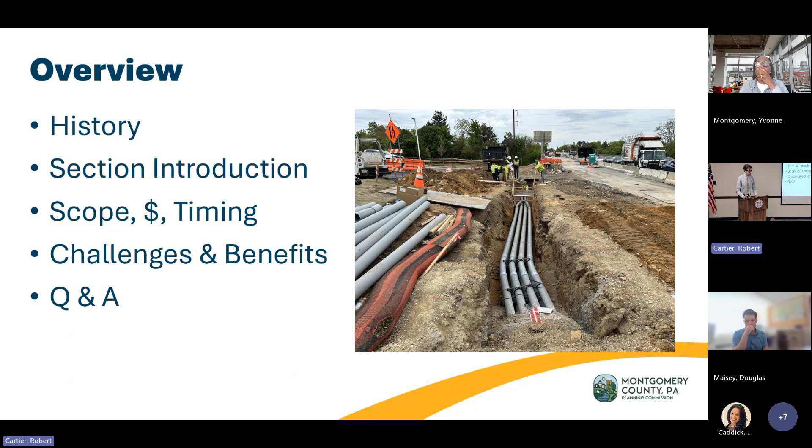The piece of Ridge Pike that the county owns is about 5 miles in total, from Norristown to Philadelphia. We actually asked Morgan Rauscher up in the County Roads and Bridges Department for the full explanation of how exactly this happened, that Montgomery County came to own Ridge Pike.

For those of you who were here with us during our MontCo Pike studies, you might know that the county owns a number of different pikes. These are all old historical turnpikes, toll roads established in some cases back in the early 1800s, like Ridge Pike, which was actually established in 1811. It operated as a toll road for most of the 1800s, and then, like many transportation assets, didn't end up making its own profit and therefore went bankrupt.

In 1872, the piece of Ridge Pike in Philadelphia was bought out by the city. The rest was kind of left in limbo, and there were a number of different acts the county had to take in the late 1800s and early 1900s. In 1905, an act said condemned or appropriated turnpikes were required to be maintained by the county. This was then turned back to the townships in 1909, and then turned back to the county in 1911.

Since 1911, Ridge Pike has been under our control in total. We first paved it as a county in the 1930s and did widening in particular pieces in the 1970s. It covers 3 municipalities at this point: Plymouth, Whitemarsh, and the Panhandle portion of Springfield Township.

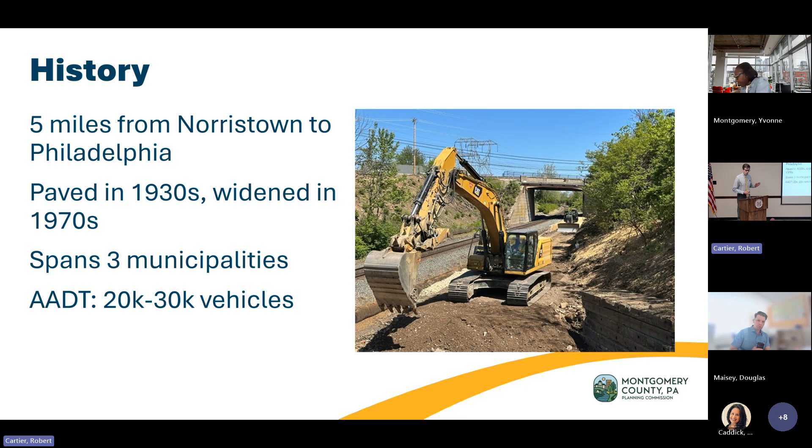Recent daily traffic counts on this stretch of Ridge Pike are in the 20 to 30,000 range. Back in the 2008 era, when we had our peak traffic counts around the region, some parts of Ridge Pike were pushing 35,000 vehicles per day. But right now we're usually in the high 20s range for all the various sections.

Here are the 4 sections we're going to be talking about today. We have broken them up into different letter-coded sections based on how the projects are progressing.

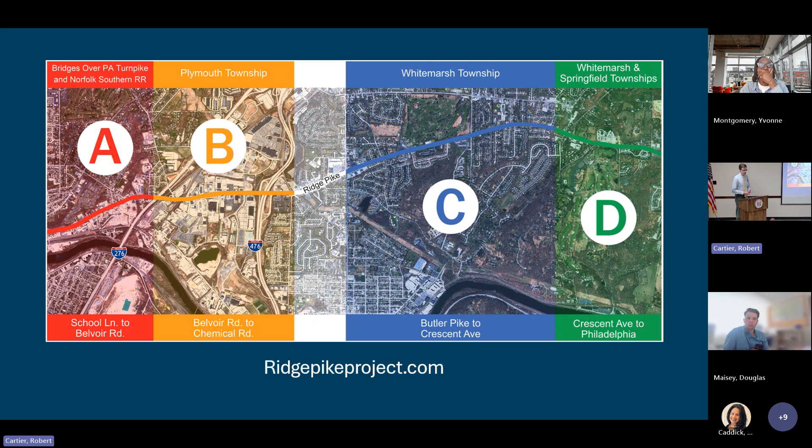Section D, closest to the city, is substantially complete. Section B is under construction now. You see the turnpike overpass basically separating sections A and B. That part in the middle, basically between Chemical Road and Butler Pike, is already a 5-lane cross-section, so we don't need to necessarily attack it from any sort of widening standpoint.

We're currently working with 10 different private organization partners across engineering, construction management, and construction inspection for the 4 different parts here. We have different funding arrangements for each of these parts, which the 3 members of the transportation section will cover. Our construction years are covering much of the 2020s, and we're hoping we're not going to go too far into the 2030s with Section C. But it's been a very large, multi-pronged, multifaceted effort to get this entire roadway reconstructed and rebuilt.

And it's cost us rather a lot of money at this point. Between the 4 sections we've had here, the capital budget, which has to get developed on a spreadsheet that is extraordinarily complicated for us, shows all the different parts and pieces of budgets that go into this, from engineering to right-of-way to construction. We're currently at an all-in cost across all 4 sections of about $230 million. I would not be surprised, given a very high PPI rating this morning and construction inflation overall, if that number passes $250 million by the time we're all said and done.

Fortunately, the county is not on the hook for the majority of this $250 million. We are getting an awful lot of funding from our federal, state, and turnpike partners, which we will cover as we go out. So I'm going to turn it over to Bobby, who's going to start leading us through some of the sections here, and we'll begin with letter A.

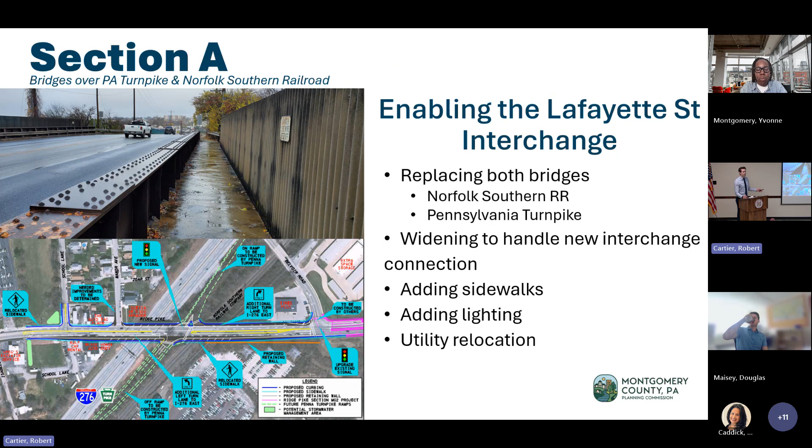Some of the scope for Section A includes replacing both bridges on this section: the Norfolk Southern Railroad Bridge, which you can see right here, and the Pennsylvania Turnpike Bridge, which is over I-276 here. Other scope items include widening the roadway from 4 to 5 lanes to handle this new interchange connection for the eastbound on and off ramps. We'll also be adding additional new sidewalks to the north and south side of the roadway, and then we're adding new lighting and relocating a number of utility lines.

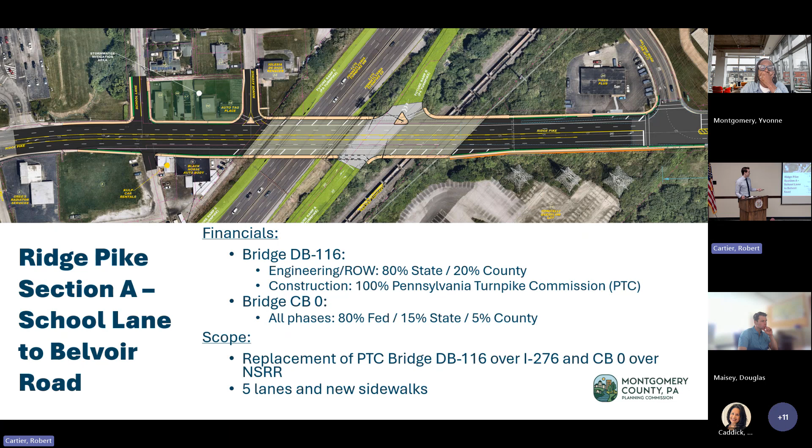To get into a high-level overview of the financials for Section A, the funding formula breaks down by bridge type. For bridge DB 116, the Pennsylvania Turnpike Bridge, engineering and right-of-way costs break down with 80% paid by the state and 20% paid by us in the county. For the construction cost of that bridge, 100% is paid by the Pennsylvania Turnpike, which is a big plus for us. For County Bridge 0, all phases including engineering, right-of-way, and construction are paid 80% by the federal government, 15% by the state, and 5% by the county.

Second, Bob, can we get rid of the stuff on the top? I'm going to try. For some reason this is a lot. We're not muted, so it's not giving us anything, but I can't do anything about this. Do you want to slam it on the table? That usually works. Even so, it's like it's not there. It's not something you can grab. Sorry, we don't see it online, but that's just here. This is our first time with Teams. Hopefully this doesn't continue to happen.

Sorry, while we have a break, Matt, can I ask you a dumb question? What's the county's role in all of this? What's the planning commission's role in Ridge Pike?

The Planning Commission's role is to help oversee the engineering design and work with construction as part of it. We're in conjunction with our roads and bridges and assets and infrastructure department. We acquired a lot of knowledge of how to run these sorts of construction projects during our work with the Lafayette Street project, where we helped Norristown reconstruct the area through there. So now that assets and infrastructure and roads and bridges is largely focusing on the county bridges, we are handling the large road projects.

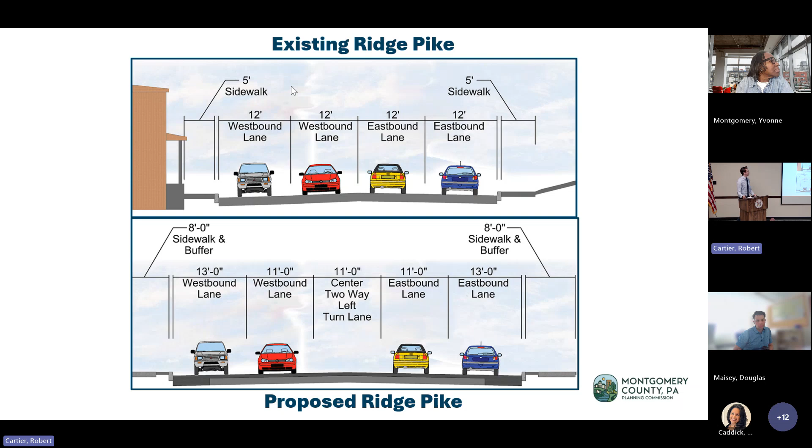Sorry about that. All right, so to go over some challenges that we're facing with Section A, one of the first ones is the overall constructability of this section.

There's also PECO transmission towers at the Belvoir intersection of Ridge Pike. With those transmission towers, there are clearance requirements and height requirements we have to abide by, so we have to make sure things like our signals and equipment like cranes, as we reconstruct the bridges on this section, are following the clearance requirements outlined by PECO.

Another challenge includes coordination with Norfolk Southern. As we are constructing this roadway, one of the bridges is over their active railroad, so we have to make sure they are able to maintain their operations while we construct our bridge.

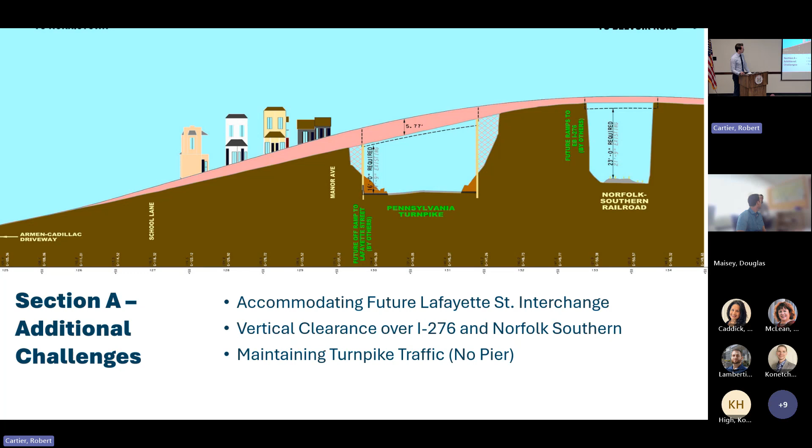Lastly, some outcomes for Section A. One outcome was our ability to work concurrently with the Lafayette Street interchange design alongside the Pennsylvania Turnpike, overlapping our tasks for design constructability, relocation of utilities, and right of way, so we're not operating in silos, but working concurrently without duplicating work.

Another outcome was our ability to work and coordinate with Section B, which is currently in construction. We have biannual meetings bringing together all the Ridge Pike partners to highlight lessons learned for each section, so any mistakes, risks, or items that come up can be implemented going forward into construction for the new sections.

And lastly, another outcome is our anticipated let date of November 2026.

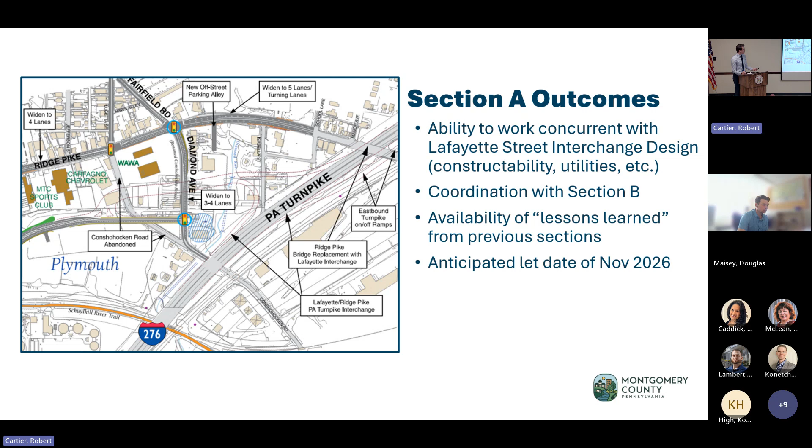Question: when all the work is done, will there be on-offs of the turnpike to both Ridge and Lafayette? Answer: the eastbound exit on and off will go directly into Ridge. Westbound on and off will come over to Lafayette Street, just west of Conshohocken—a split interchange.

Thank you. Now we're going to talk about Section B.

Hi everybody, my name is Laureen Sendel-Grant. Ridge Pike is my primary responsibility here.

We're currently in construction for Section B, which goes from Belvoir Road to Chemical Road, and we're hoping it finally ends a year from now in 2027.

So what we did here was widen a dangerous stretch. If you've driven on Ridge Pike, the access into the car dealerships here is pretty confusing. We're doing a full depth reconstruction, widening to add a center turn lane which will make those turns a lot safer in the future, replacing the Norfolk Southern Bridge, and rehabilitating the bridges at I-476 and Plymouth Creek.

We're adding sidewalks and crosswalks to make it safer for pedestrians, and eliminating the jug handle, which will make it easier to access and get off of Ridge Pike there.

We're building improved bus stops and adding new signalized intersections. New signals will be at Carland and Industrial Way, and one at the exit from 476 South, so you'll be able to make a right and left turn there instead of going down to that jug handle.

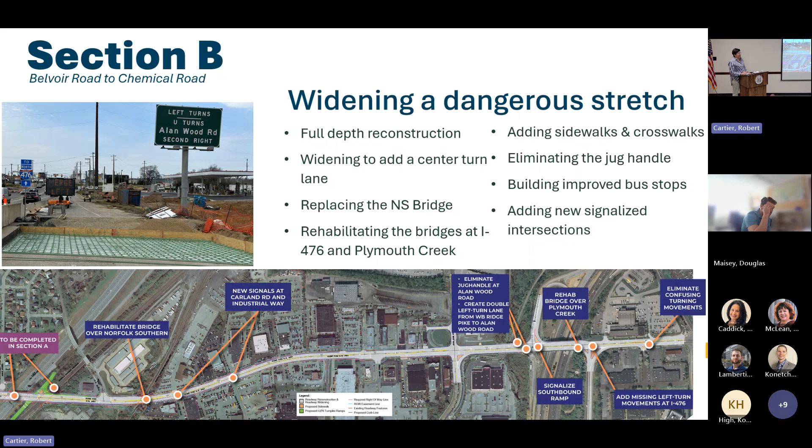These are the financials, from Belvoir Road to Carland Road right here.

And then we are the other half of Ridge Pike, from Regal Drive down to Chemical Road here. So, this is Belvoir Road.

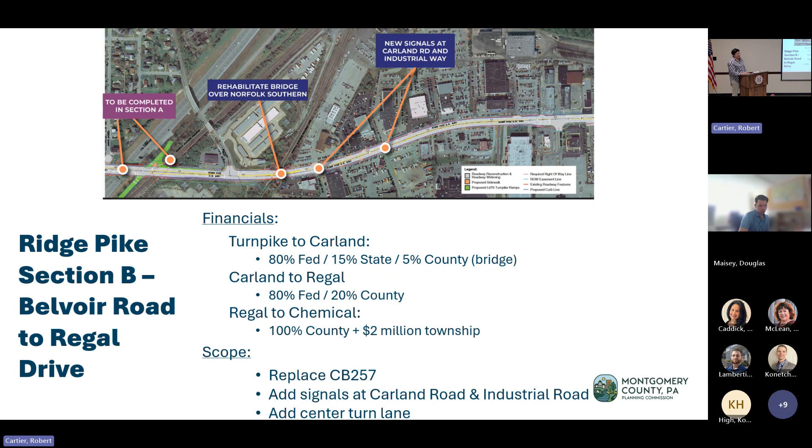It's 80% federal, 15% state, and 5% county. Carland to Regal is a different funding, and that's 80% federal, 20% county. And then finally from Regal to Chemical is 100% county. Next slide.

Thank you. So these are the challenges. There were many on section B. Again, it's utility coordination. This road is so old, as you know, that there's so many utilities buried underneath it. Even the utilities don't know what they've got down there. It was discovery learning every time we put a hole in the ground.

What a surprise. So the other surprise was dirty dirt. Testing during preliminary design didn't show us any dirty dirt, but actually the dirt came up during excavation or removal of the railroad bridge.

It's all naturally occurring, I gotta tell you, but it doesn't help that the railroad had all kinds of railroad ties buried everywhere, and the creosote and stuff contaminated the soil. There is naturally occurring materials in dirt, like arsenic. You see all those mountains along the turnpike, those are all naturally occurring, and they do exceed the standards.

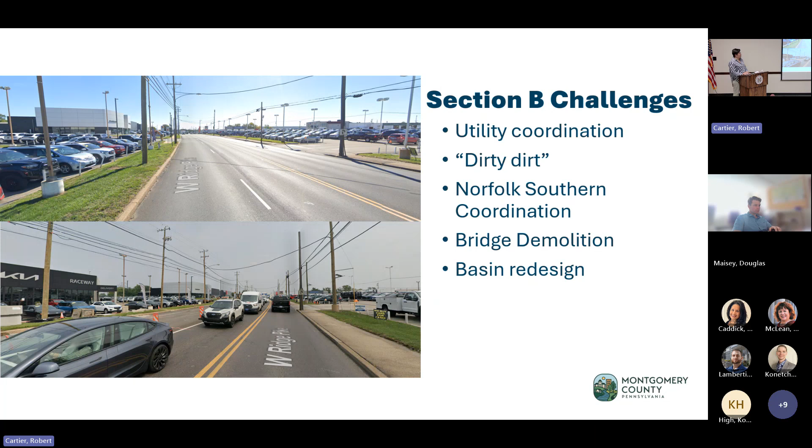So, but in the long run, we're gonna have a center lane down the entire length of it. We were able to have phased construction, so all of it, we only originally planned for 3 phases, and now we've got 6 or 7. But it allows, because of the utilities, we had to work around their relocation, so we were able to jump around and get stuff done.

Moving the dirty dirt off-site. There was no extra right-of-way on this project to store materials for dirty dirt that we encountered, and we were able to work with PennDOT to get it stored on their Route 23. The 23 route that comes into Bridgeport that was never completed, that's where we're storing it. It's just a holding area till we can take it off to the landfills.

Have there been any economic impact claims from car dealerships? Not yet. We have a very good relationship with all of the car dealerships there.

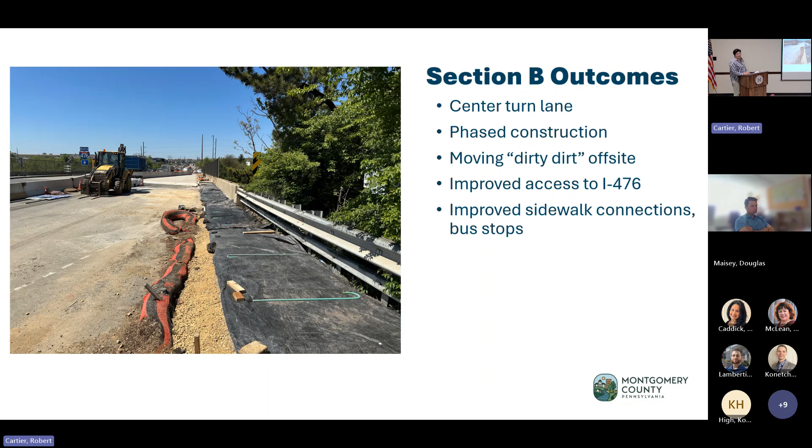Improve sidewalk connections, bus stops in the end. Next slide. So section C, kind of back to Bobby.

So section C's limits start at Harmon Road and end at Crescent Ave. The anticipated let date for construction is an estimated late 2027 for C. So the purpose of C is to rebuild a tired road. This road is outdated and it needs to be updated to the century.

So we're doing that by full depth reconstruction, adding turn lanes at major intersections to improve traffic flow, improving access management for residential properties on this corridor, adding sidewalks and crosswalks across the corridor, building improved bus stops, and lastly, adding new signalized intersections to certain areas of the corridor.

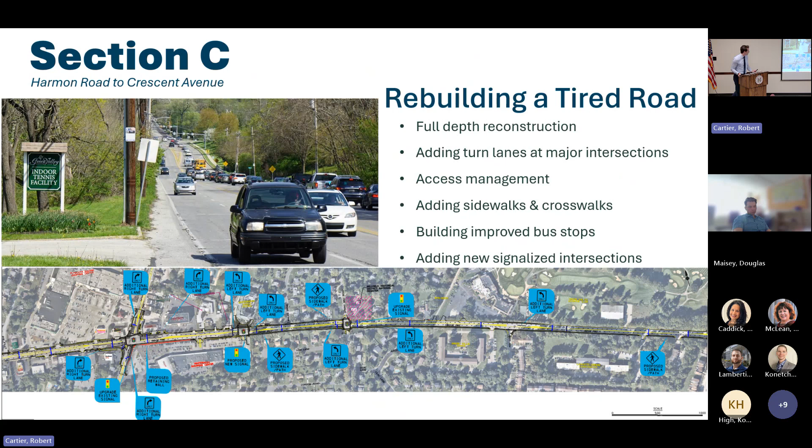As section C is one of our largest sections by mileage, the map below shows Harmon Road to Birch Drive, and then this next map shows Birch Drive to Crescent Ave. I'll go into detail a little bit by section, by segment.

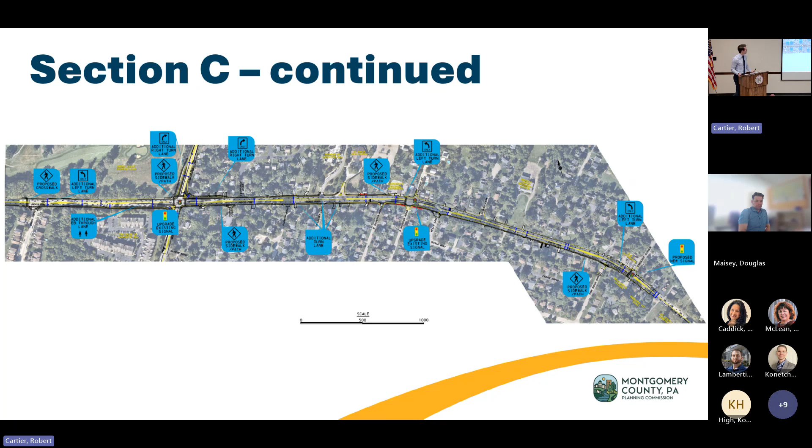So an overview, the nice thing about C is the financial breakdown is consistent across the entire corridor. The funding formula for design is 100% of those costs incurred by the county, while utility, right-of-way, and construction costs: 80% of those costs are covered by the federal government, while 20% of those costs are covered by the county.

The overall scope for this section includes a 4-lane cross section at a minimum, but some major intersections will include a 5th exclusive turn lane to improve traffic flow and safety. Other scope includes adding signals and improving current signals, improving drainage on the corridor, and adding 5 stormwater basins across the entire corridor. Lastly, we'll be adding new sidewalks to this section to have a complete sidewalk network on the south side of the roadway.

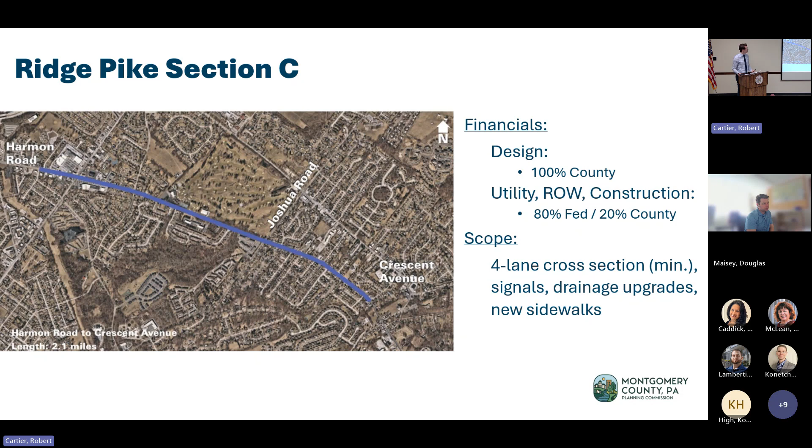So first we'll go through the Harmon Road to Spring Mill Road segment. Some quick overviews of the scope changes: we'll be updating the existing signal at Butler Pike and Ridge Pike, proposing a new signal at Whitemarsh Shopping Center to help with the flow of traffic into the establishment, and including some additional exclusive turn lanes at this intersection.

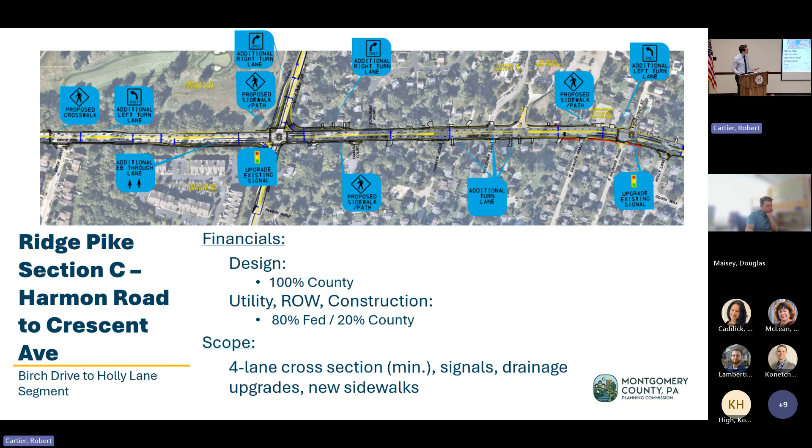Next, we have Spring Mill Road to Birch Drive. Again, updating existing signals here, adding some exclusive turn lanes to allow for access onto some of the side streets. Next, we have Birch Drive to Holly Lane. Again, updating some existing signals, adding additional through lanes to improve bottlenecks, and adding that sidewalk network on the south side here.

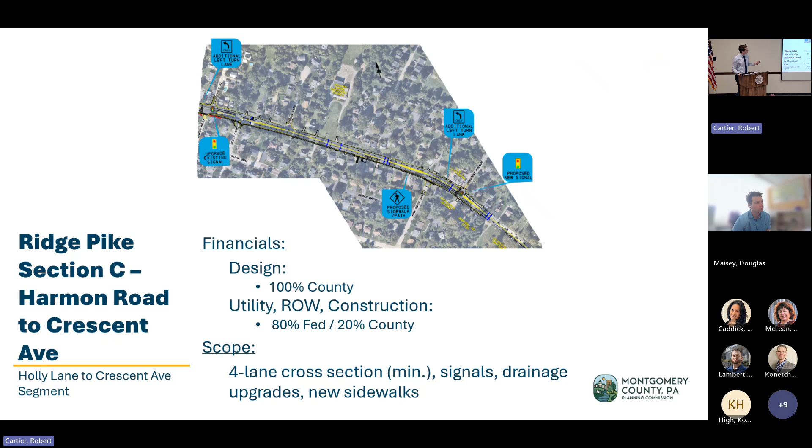And lastly, we have the Holly Lane to Crescent Ave segment. We'll be adding a new signal at Crescent Ave at this intersection, updating the signal at Chestnut Street, and adding some additional left turn lanes, again, to improve traffic flow.

So Russell's going to go over some right-of-way challenges we've had with Section C. Thank you, Bobby. We are in the thick of it when it comes to acquiring the needed right-of-way for Section C. We need right-of-way from 141 parcels along Ridge Pike, as well as some side streets where the intersections are being improved. Most of the valuations for those acquisitions are completed, but we still have a little bit more to do. In terms of numbers, we've amicably settled with 40 parcels so far, and we've authorized condemnation for 15 parcels. But for those condemned parcels, we're still negotiating with the property owners, hoping to reach an amicable settlement.

One big challenge we have is unknown owner, or ghost, right-of-way. There are small parcels along the corridor where there is no clear owner. The reason why is because when this area was developed in the 1960s and 1970s, the developers intended to give this land to the county, but the county did not accept it and did not record it. So it's kind of existed in limbo since. That means when we want to acquire this land, we have to deposit the money into court where anyone who feels like they have a claim can submit one. But we're confident that nobody else other than the county has a claim on this ghost right-of-way.

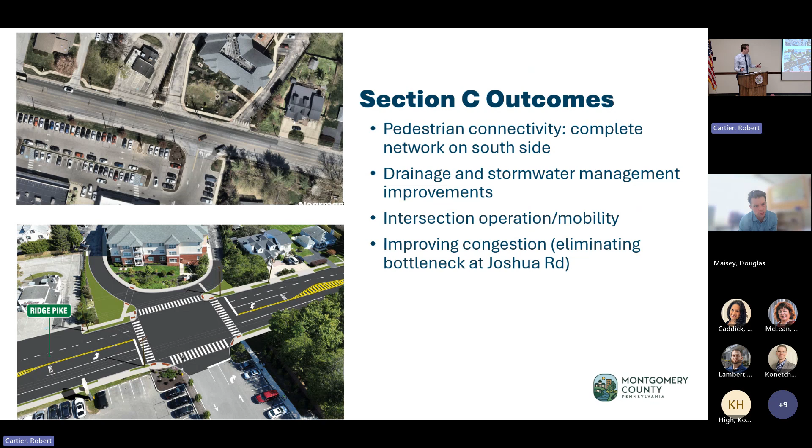Back to you, Bobby. Some outcomes we've had with Section C, or future outcomes, include overall improved pedestrian connectivity. We're completing a complete sidewalk network on the south side of this section, which will be nice for pedestrian traffic. We'll also be improving drainage and stormwater along this corridor with the creation of the 5 stormwater basins. We'll also have improved intersection operation and mobility as we add those 5th exclusive turning lanes to allow for flow of traffic and to prevent the likelihood of crashes. Lastly, we will be improving congestion on this corridor by eliminating the bottleneck at Joshua Road to widen that section of the roadway to 2 lanes.

Next, we're going to Section D.

Okay, oh good, we're complete now.

Thank you. Section D, Crescent Avenue to Philadelphia. We started this project in August of 2022, and it is now substantially complete.

Next slide. So we eliminated the bottleneck. If you remember Ridge Pike here between Smith, this is Hollids, you all know Hollids Hardware there. There was a bottleneck along this stretch of Ridge Pike where there's one lane in one direction and two lanes coming westbound. So the full depth reconstruction, this is a very old roadway.

We added sidewalks along parts of the north, but all of the south - so the south side of the project is continuous sidewalk. And we built improved bus stops and we added signals. We added a signal here at Barren Hill, and improved that intersection.

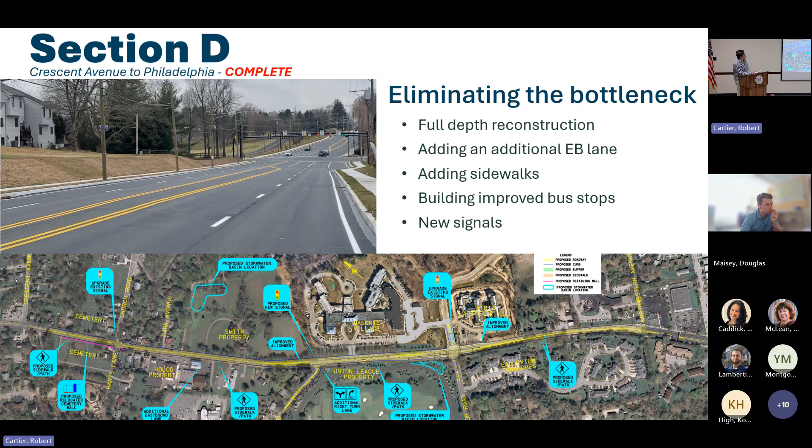Next slide. So this whole project was 100% county funded. Next slide. We had a ribbon cutting in November of 2024. I don't know if any of you were there.

Challenges: the proximity, as you can see, we widened this road to add another lane here in the middle, so we came very close to the front of some of these houses. Utility coordination - again, even though you coordinate with utilities prior to construction, once you get into construction, it's a different ballgame.

There's three senior facilities. Do you have to pay these people to be moved, in the cemetery? The church handled all that, but we compensated them for everything.

Next slide. So these are the outcomes though. At the end of this project, we eliminated the bottleneck. I think traffic's flowing much cleaner out there now. We added new sidewalks, better bus stops, and we added this capacity for emergency management situations. As I said, there's three senior assisted living facilities between Manor Road and Northwestern on this road, and the emergency services people were very concerned that we not interrupt their ability to respond there. We did that by adding emergency preemption to the signals.

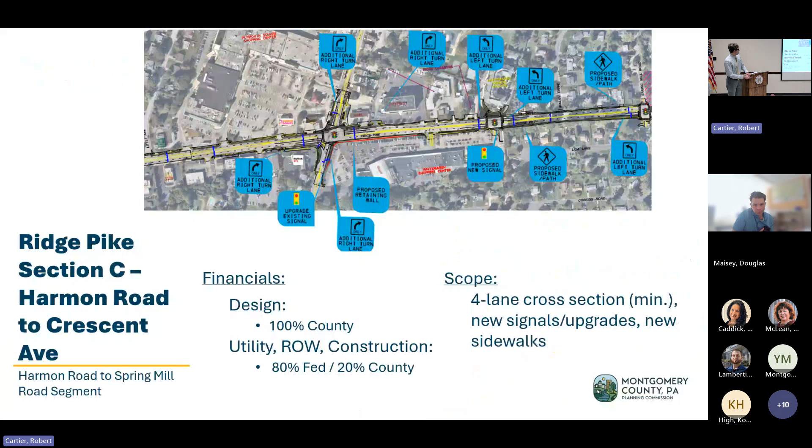The county wants to have sidewalk areas in our right of way. So a lot of the time when we are acquiring right of way, it is to take the piece of sidewalk that is off of their property and onto county right of way. We are still able to say the sidewalk is the responsibility of the homeowner because all of the municipalities along this area have that in their ordinance saying, even if it is in public right of way, the sidewalk is still their responsibility.

That's clear - I thought you were going to take right of way and then take sidewalk, that was my question. For the most part, especially in most of section C, the 4-lane cross section is going to remain along most of it. So all we're doing is saying the sidewalks are...

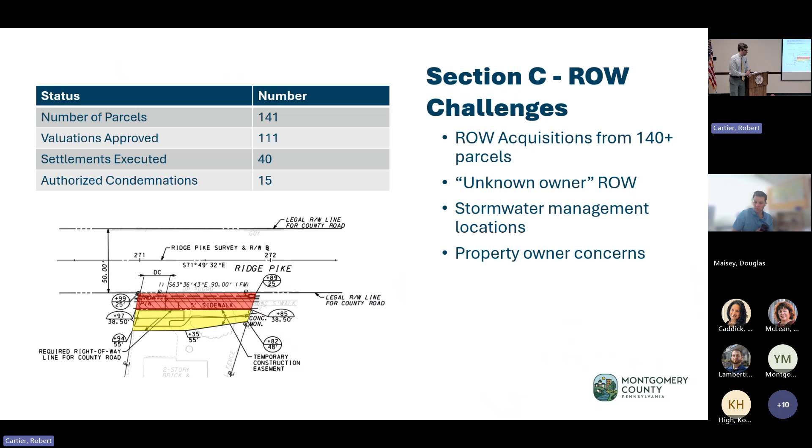Naomi? Morning, how are you? Trying to vote. Sorry Naomi, we tried, I don't think those things... see, Naomi doesn't even need a team, she can do it all by herself.

Robert, can you try and take that? I don't think count off, see if it works out before you get the next presentation.

We have community planning on Collegeville Borough, Douglas Township, and West Norriton. So hi everyone, I'm Naomi Crimm, a senior community planner, and I'm going to talk about 3 of the communities where I work.

Douglas, West Norriton, and Collegeville all renewed their contracts for 2026 to 2028. So I'll go through some of the past work we completed in the prior contract, and then some of the things that we're working on now.

What do I do with these? Which one do I do? One's a laser, the bigger one is. One is your clicker, left hand is the clicker.

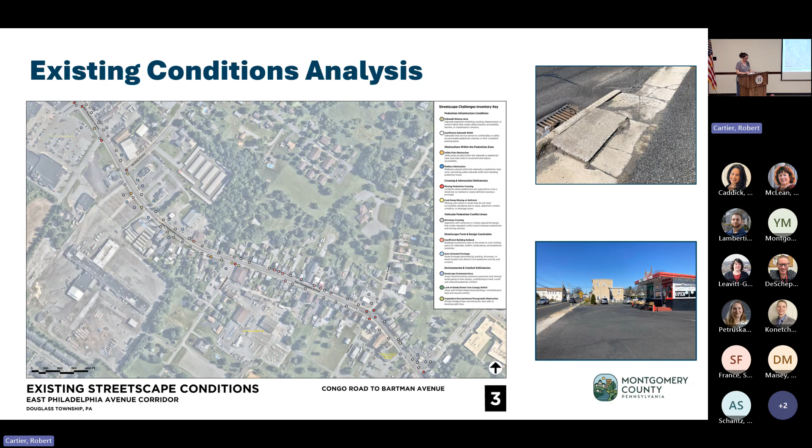I want to say a couple more things about this. In terms of next steps for the project, we had an intro meeting with PennDOT, and they were actually somewhat receptive to a number of the things we had been talking about in terms of proposed solutions. We have an open house happening next week, and then we'll incorporate the input we get into the plan. The Commerce Department is working on a market analysis, and the township is working with the post office on figuring out a solution to the mailboxes and the sidewalk, which is an ongoing saga. The township is also hoping to apply for a streetscape improvement grant for the 1200 block, so it's sort of like a pilot project.

Okay, moving on to West Norriton. West Norriton has about 16,000 residents, 2,700 residents per square mile. Again, the population is aging, median age of 45, and it has a lot of households with just a single person, 40% of households, and the average household size is decreasing. Median household income of 77,000, and not a lot of development built in the past 20 years, 879 units since 2000. The township is largely built out.

In 2025, we completed and the township adopted a comprehensive plan update. Their prior plan was probably from the 60s or 70s, and it only existed in a big book. They had a small pamphlet sort of update in 2010, so they were really overdue for a plan update. In terms of a full comprehensive plan, or was it just an update? This was a full comprehensive plan, yeah. In 2010 they did a little pamphlet kind of thing, but yeah.

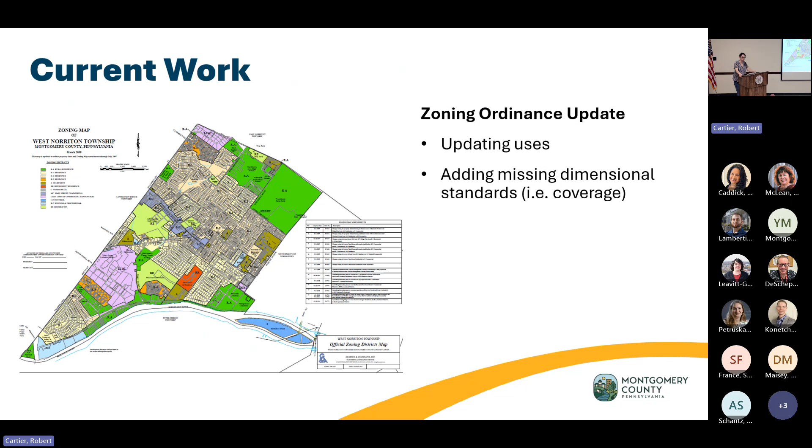And then Collegeville Borough - a small borough, less than 2 square miles, population just 5,000 residents, home of Ursinus College. There's been a 10% increase in population since 2000, and it skews young because of the college, so 41% of residents are between the ages of 15 and 24.

In the 4 years I've been working in Collegeville, there hasn't been a huge amount of development activity, mostly some changes in the shopping centers on Route 29.

That is ongoing. So recently completed work includes a Main Street revitalization plan. This is something we worked on with the consultants Derck and Edson, and that focused primarily on the 400 block of Main Street. MCPC helped with the transportation and zoning recommendations for the plan. And then the other thing we've done recently is we finished 2 zoning ordinance updates for Main Street to implement the revitalization plan.

Sorry, do they have a Main Street manager? They do not, no. So that was done in 2024, but I thought there were some changes that they kind of were not - there was some pushback in trying to implement this.

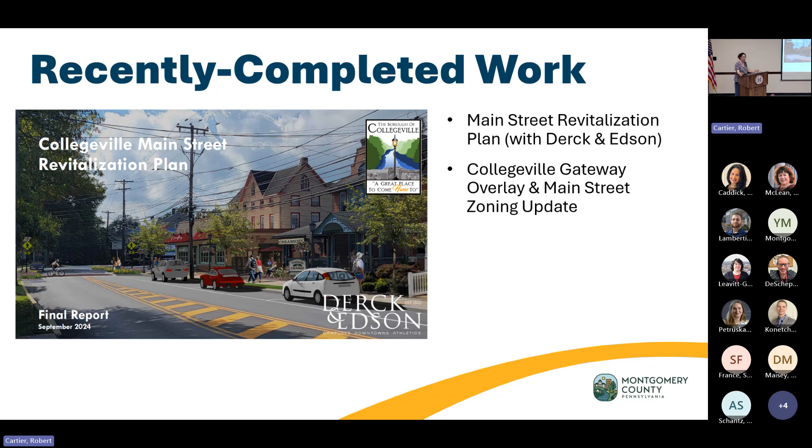So yeah, the revitalization plan - just some context, there are many buildings on Main that are underutilized. The college owns many of them, and some are student housing, but the college had been looking for commercial tenants. Most of the commercial activity is on the 300 block further down. So the 400 block has a little bit of commercial activity, but it's sort of spread out, and it's a lot of residences.

So the revitalization plan recommends encouraging renovations, additions, and new buildings that reflect the existing architecture found along Main. This image just shows some of the streetscape recommendations - crosswalks, pedestrian lighting, widening the sidewalks, putting in a grass verge, and bump outs in some places.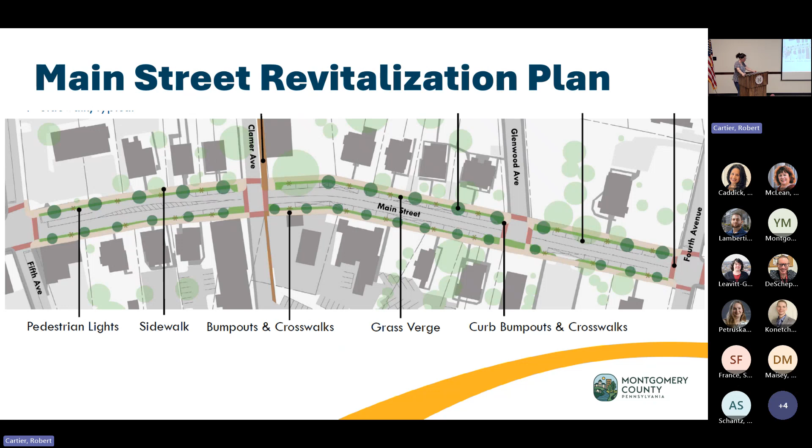The plan recommends converting Clamer Hall, down by Glenwood Ave, which is currently a college dorm, into a town square civic space that could host concerts, events, and markets. The plan also recommends adding additional on and off street parking, and then proposes an alley behind Main Street that would help with traffic flow and also help make a bike connection via Clamer down to a proposed trail connection to the Perkiomen behind Borough Hall.

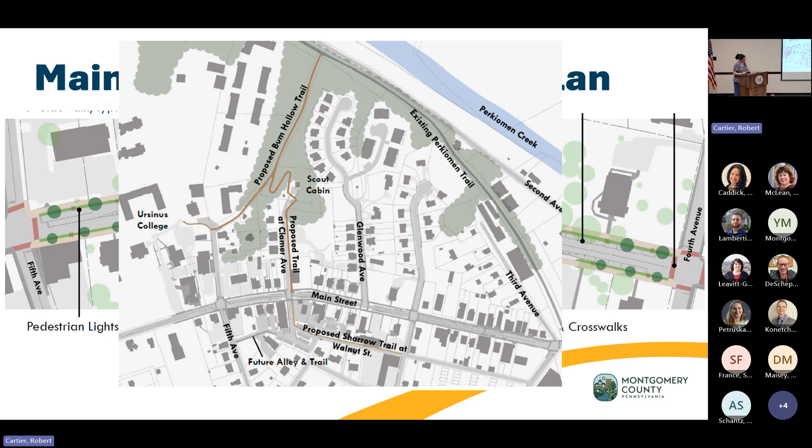So we've done some zoning updates to Main Street in the past couple of years. The first one was the Collegeville Gateway overlay, which was completed in 2022. That's an overlay district at the corner of 5th and Main, which would allow for higher mixed-use development up to 50 feet. The district includes detailed greening and streetscape standards, pedestrian design standards, that kind of thing.

This image shows what the revitalization plan recommends for zoning updates for the rest of Main Street, for the 300 and 400 blocks. The Main Street district is proposed to replace the existing zoning along Main, which is currently 2 separate districts. It's similar to the overlay in terms of the design standards and the uses, but slightly lower heights.

Collegeville wants to preserve its small town feel and existing architecture, but also attract new businesses and allow for new development. So there's this tricky balance of allowing the amount of new development that they're comfortable with and the density of that development, but also allowing for enough density so that a developer could actually build something. This zoning district stipulates how building additions can happen, and it's up for adoption next month.

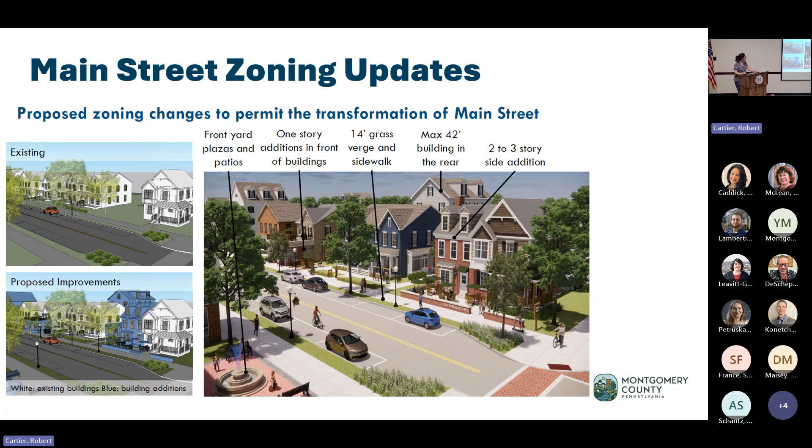We're currently working with Barry and Jeff in design to create concept plans for the borough's 4 parks and open space areas. This is a borough-wide parks master plan. The borough wanted to update play equipment at Community Park—this is the plan for Community Park—but they asked for assistance with a full parks plan to situate the role and amenities at each park within the larger community.

So the plan includes Waterworks Park, which is jointly owned with Trappe, Community Park shown here, Hunsberger Woods, and Creekside Park, which is the borough's newest park on the Perkiomen and has a boat launch and a parking area. We're working on that plan, hopefully getting them a draft within the month.

There are a number of ordinance updates that the borough manager wants to complete, starting with the sign ordinance, which I've been working with them on and off on for quite a while. But they also want to update sober living facilities, accessory dwelling units, chickens, dispensaries, food trucks, skill machines, tattoo parlors. So the list goes on.

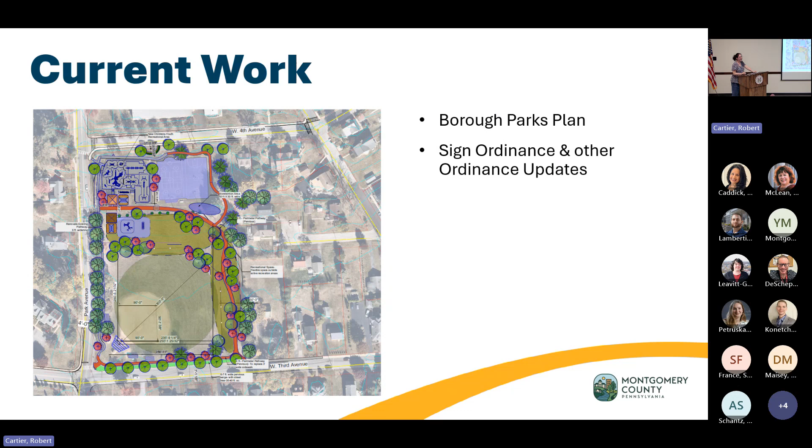Quite a mix. Let's put them all in the same zone. It's ironic, a sober living place in a college town. I don't have off the top of my head what the context is for the desire to update the sober living facility ordinance. It's possible it exists already and is outdated and needs updating. I don't remember, but that was the list I was sent a couple of years ago. Someone joked: let them raise chickens. There was confusion over 'sober' versus 'silver' living—sober living, S-O-B-E-R, is a zoning classification, a use, like a group home, a dry group home for people recovering, transitional housing. Sorry, Naomi, we just digressed for a little bit.

All good. Here's the terms of Collegeville's contract, and that's all I've got.

Any questions for Naomi on these 3 communities? I know we're running late. Just real quick—on Douglas, the issues to me are really difficult because you have all these new people moving into the townhouses, and I don't know who filled out the survey, but the people who want to keep the town—it's a real challenge, you need buy-in from all those new people. For sure, and that's really a challenge because it's where most of our farms are.